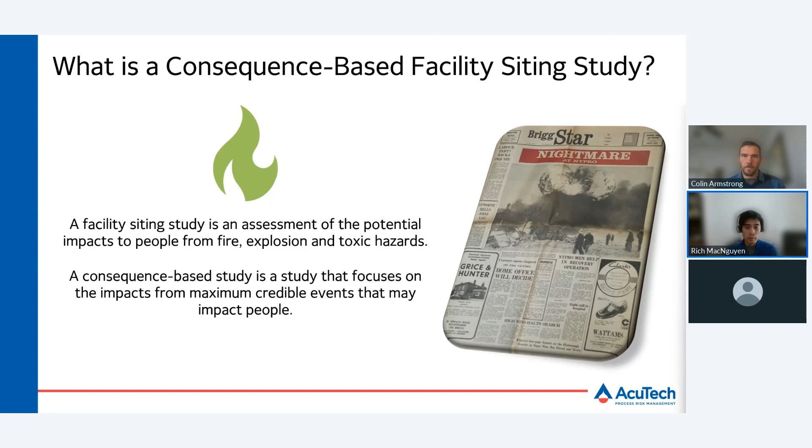So why perform a facility siting study? While the main objective is to understand the risk to occupied buildings, it answers the question, are people at my site safe? Reasons that may drive the need to perform a facility siting study typically include processes or operations known to be hazardous with potential to impact occupied buildings, buildings too close to the hazardous areas, buildings known or suspected to be under-designed to withstand potential impact from the hazardous process, siting new buildings, portable buildings, and tents to make sure they're optimally placed and meet design criteria for hazardous impacts, and determining optimal placement for new hazardous processes.

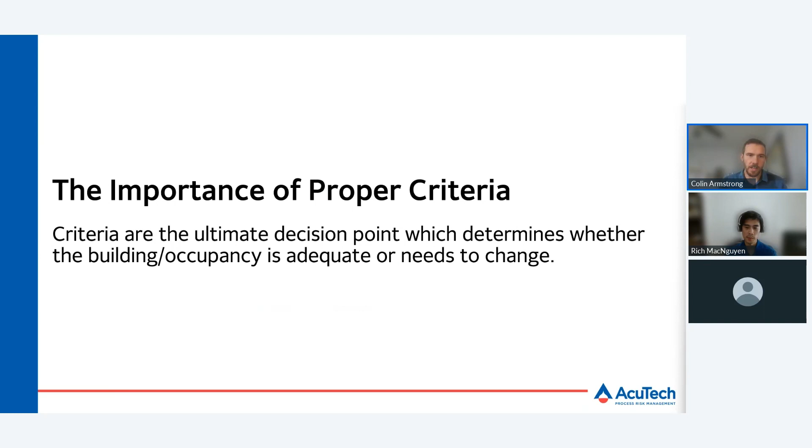Criteria used in siting studies are the ultimate decision point, which determines whether siting is adequate or needs to change. The impact criteria determines if building designs are acceptable relative to on-site hazards or new siting locations are safe. Proper criteria ensures that people at my site are safe, but the question becomes, when is the criteria proper? That's when it ensures safety without being overly burdensome. Criteria must consider the hazard type, the emergency response plan, and the building construction.

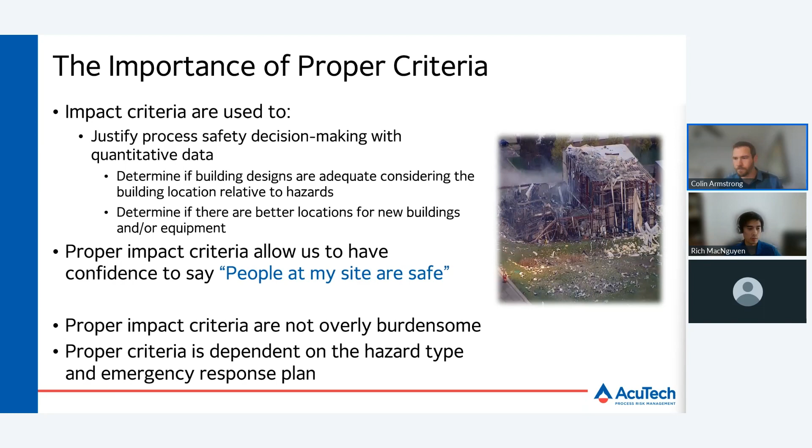For fire hazards, we can divide these into two general categories: short duration and long duration fire hazards. Long duration fire hazards are pool fires and jet fires, and these present for an extended period. For buildings and building occupants, the primary hazard is impingement or very high thermal radiation levels. These can result in structure fire, temperature rise, or impairment of egress routes.

A response concept must be chosen for long duration fire hazards if they can impact a building, and that response concept impacts the criteria that must be considered. The response concepts are generally to shelter in place or egress, and the response plan affects the hazards to people, and therefore the criteria that should be selected to determine if people at the site are safe.

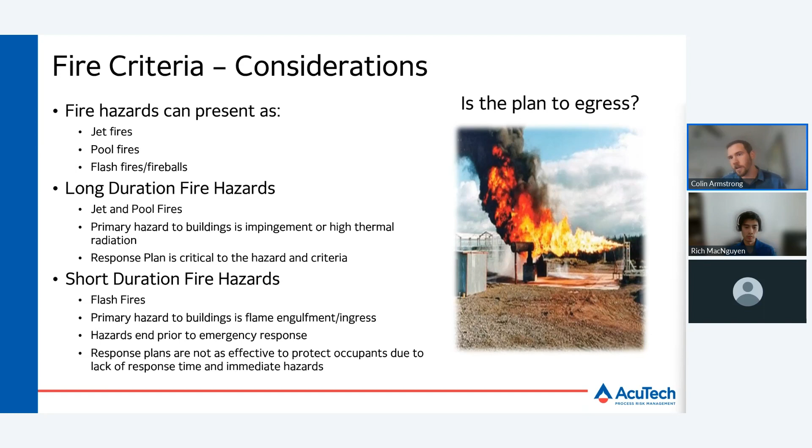Short duration fire hazards like flash fires or fireballs occur rapidly. There is no time for response, and they either result in immediate impacts or occur without impact. There's no time for response to mitigate the potential hazard. So the driver of the impact and the criteria becomes the personnel's location and the building construction if the personnel are located indoors, or we're talking about an indoor offsite population.

For long duration fire hazards, sheltering in place or egressing affects the hazard exposure to building occupants. Sheltering personnel are affected for the duration of a fire. They may be exposed to hazards from the building structure being ignited, if constructed of combustible material, internal temperature rise due to the fire outside, and potentially smoke ingress as well. Defined shelters must consider how long personnel need to remain in the building to operate the process, and how long it may be until the event is controlled.

Shelters often require emergency response functions to be conducted after an event, so we need to consider the duration of the event and the duration that we need to remain and operate the process for emergency control. Once the event is controlled, people can safely egress from the building, but they need to be able to shelter to withstand the duration of that design fire hazard.

Where the response concept is to egress, we must consider that personnel may be exposed directly to thermal radiation as they attempt to reach a safe distance or a muster point. We may consider whether people will be shielded from thermal radiation during egress and how far people must travel. Are the exit routes located away from hazards? Does the building provide shielding from jet fires or pool fires? These all would affect the way that people are exposed as they egress from the building and can be considered in the criteria.

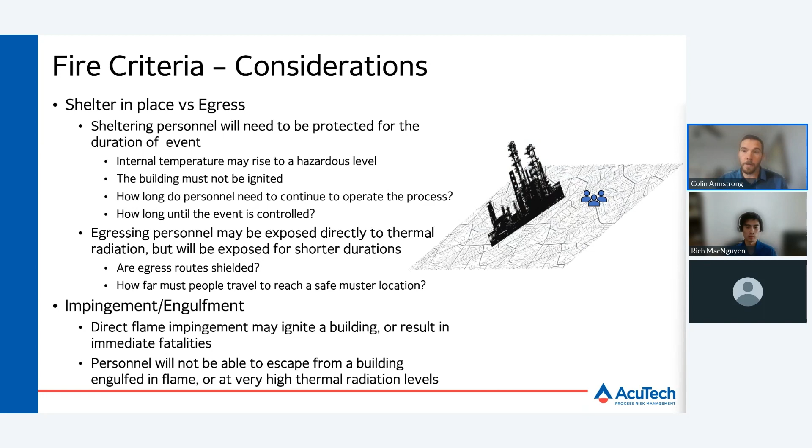Shelter-in-place locations must be designed to withstand engulfment, impingement, or high thermal radiation levels based on the maximum credible fire hazards identified in the siting study.

Egressing personnel will be exposed to thermal radiation levels upon ignition of a flame, but may seek refuge. Probit analysis can consider the impacts to personnel by evaluating not only thermal radiation levels, but also the duration of exposure. In the simplest form, these methods assume a person is standing still, exposed at the initial thermal radiation level for the duration of the fire hazard, or an assumed duration to reach a safe location.

of a lethal exposure from fire hazards to personnel outdoors in a refinery. A defined egress plan was considered, and a Probit equation was used to integrate the thermal dose over the egress route, considering the egress speed, the thermal radiation profile of the flame from pool fires and jet fires, as well as the distance to reach safety.

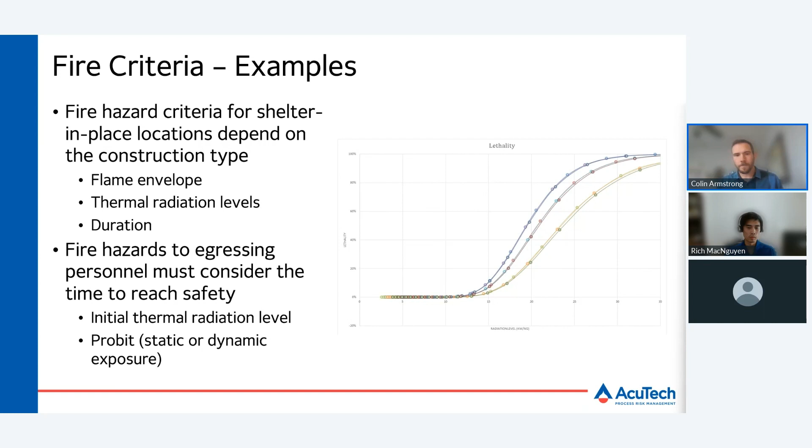For asset damage, we must consider a number of factors when evaluating criteria for fire hazards. The materials of construction, safeguards, and escalation potential affect the acceptable fire impingement criteria for assets. Generally, assets are damaged by direct fire impingement, although high thermal radiation levels may damage some equipment like cable trays and instrumentation and electrical at lower levels.

Criteria for asset damage can be found in the IOGP Risk Assessment Data Directory and other data resources. A detailed fire hazard analysis can be completed to assess potential asset damage that could result from a loss of containment scenario resulting in a fire hazard.

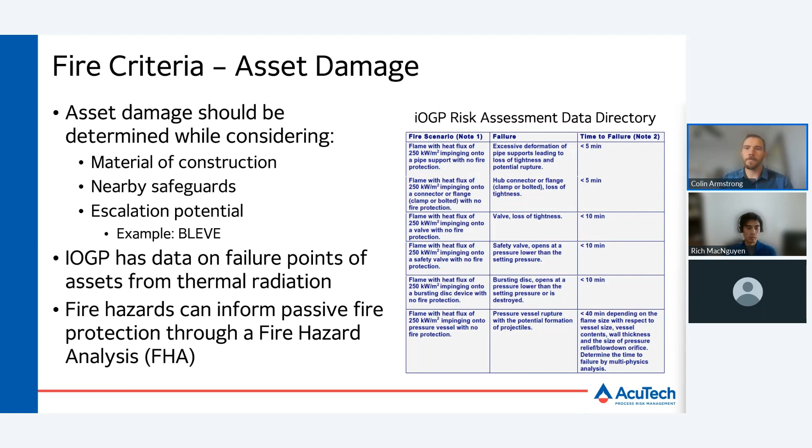Safeguards designed to mitigate fire hazards may be considered when criteria are set as well, although evaluation to ensure that the safeguard is effective to mitigate the hazard should be considered. For example, firewalls may not be rated for hydrocarbon fire protection, but rather structure fire, which presents lower thermal radiation and temperature profiles. A 60-minute A-rated firewall will not withstand a 60-minute jet fire.

But for long-duration fire events, safeguards may include firewalls, fire rating, deluge, or other extinguishing measures, as well as effective detection and isolation measures that stop the flow of fuel to the flame and mitigate the duration of the fire event. For short-duration fires, such as flash fires, building occupants may be protected by buildings that are tightly sealed with

positive pressure, interlocks to gas detection, and other measures. But if buildings have operable windows or doors that would allow for vapor ingress, or large bay doors that are maintained open, these factors should be considered in the siting criteria as well.

Many times we see workshops and other buildings where work is done that have large bay doors. Always, when on site evaluating occupied buildings, I make sure to ask: are these bay doors maintained open? Maybe we're there in the winter, they keep them closed to keep the building warm, but in the summer they keep them open at all times to allow for fresh air into the building and cooling. And in that case, we have a hazard of potential for flammable vapor ingress. Those people would not be protected in a flash fire event, where others may be.

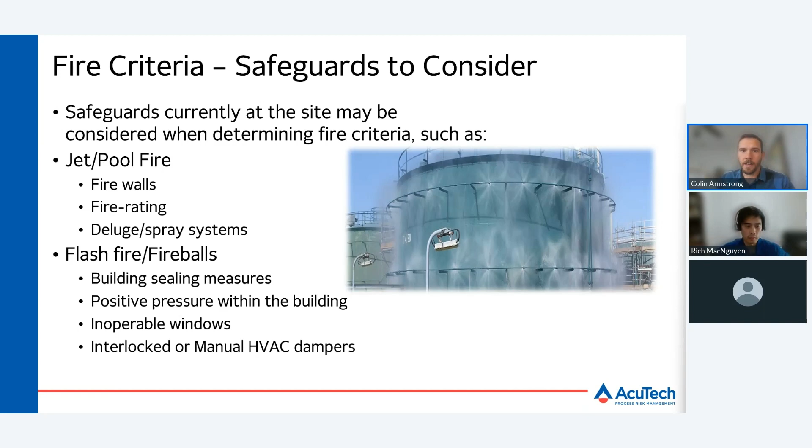Thanks, Colin. So now we will provide an overview of blast hazards. Blast refers to an event that can generate overpressure, which can be generated from a variety of sources. The blast events typically assessed in facility siting studies include vapor cloud explosion. These occur when flammable vapor accumulates in an obstructed region, which has a certain level of congestion and confinement, and then encounters an ignition source. Upon ignition, the vapor undergoes rapid combustion, resulting in an explosion that can generate overpressure.

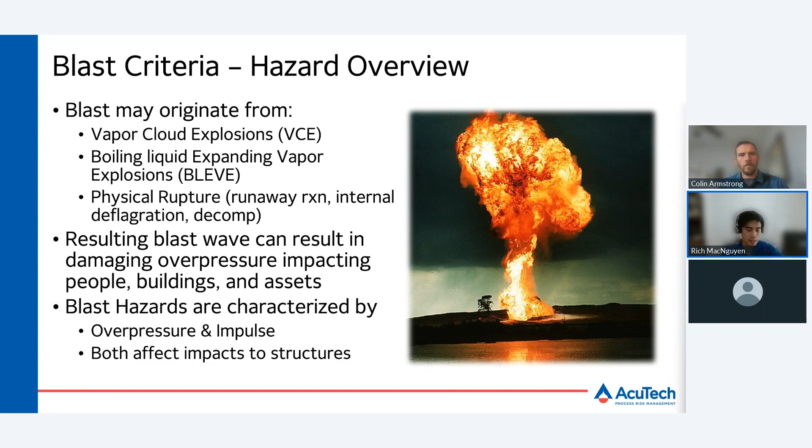Finally, physical rupture of a vessel or pressure vessel burst can also generate overpressure. These can occur from runaway reaction, internal deflagration of flammable vapor or combustible dust, or decomposition. The blast wave, whatever the source may be, may result in damaging overpressure that can impact people, building, and assets. The blast hazards are characterized by overpressure and impulse, and both are important factors in determining the magnitude of impacts to vulnerable targets, such as structures. The resulting impact depends on the type of target assessed, whether it be people, buildings, or assets, and the severity of the blast.

To develop blast criteria, the characteristics of the target and their vulnerability to blast overpressure and impulse must be understood. For buildings, the blast impact is dependent on building construction.

The literature provides building damage level curves for generic building categories that correlate damage with overpressure and impulse generated by the blast. The first approach is to use generic building categories, which is effective for assessing a large number of buildings. When many buildings are within a study, generic criteria can be used for screening analysis to categorize buildings into low and high impact categories.

Criteria may be based on overpressure only or a combination of overpressure and impulse. Criteria based on overpressure only simplifies the analysis and is suitable for screening purposes, as the criteria will assume a conservative impulse. For a more refined analysis, criteria can also consider impulse in addition to overpressure.

Building-specific analysis can be undertaken when refinements are required regarding the building impacts. This is typically done to account for building-specific features such as blast resistance. With a detailed analysis, the blast impact can be refined to account for blast angle, and impacts can be determined more specifically to each side of the building and specific building components, such as windows and doors.

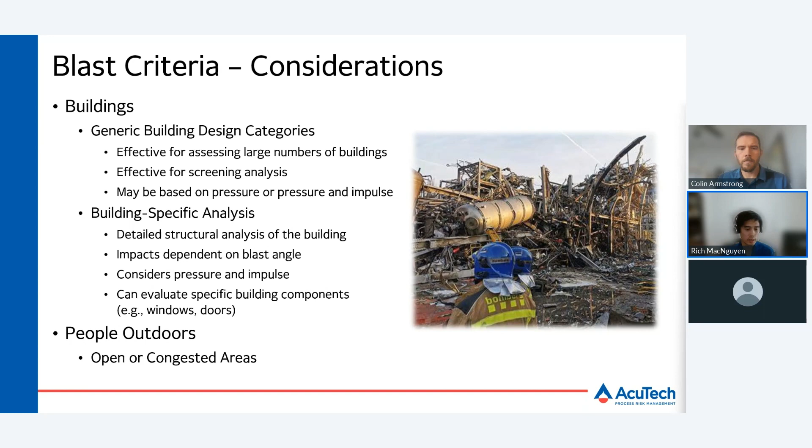Once building impact criteria are defined, it could then be associated with vulnerability for building occupants. For people outdoors, the criteria should consider where personnel could be located. Criteria are different for personnel located in relatively open areas compared to personnel within or near congested process areas, or large obstacles.

As mentioned previously, blast criteria can be defined using only overpressure. When the criteria are defined by overpressure, the impulse is assumed to be of sufficient duration to cause damage and result in a particular occupant vulnerability value. This is a conservative assumption and may be overly conservative for short duration blasts involving small cloud volumes.

So, next slide, please, Colin.

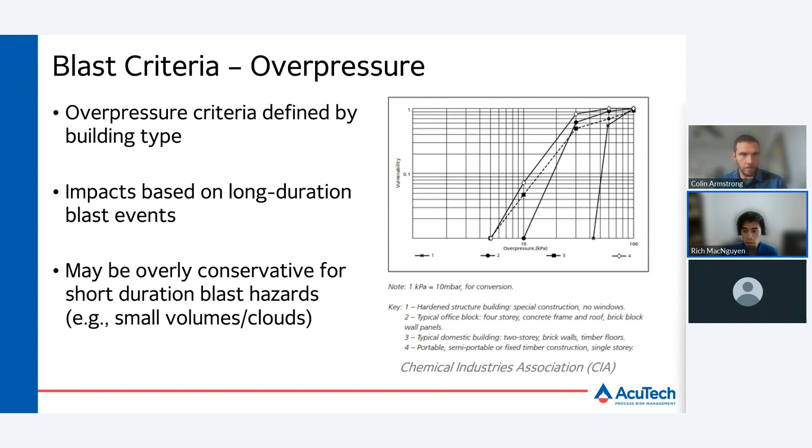Building damage levels are separated by curves on the plot, with building damage levels increasing as overpressure and impulse increase. To determine the building damage level, the overpressure and impulse from the blast scenario are plotted, and the region in which the overpressure impulse falls is the estimated building damage level.

Once the building damage level is determined, the vulnerability of building occupants can be estimated, which is also dependent on the building type.

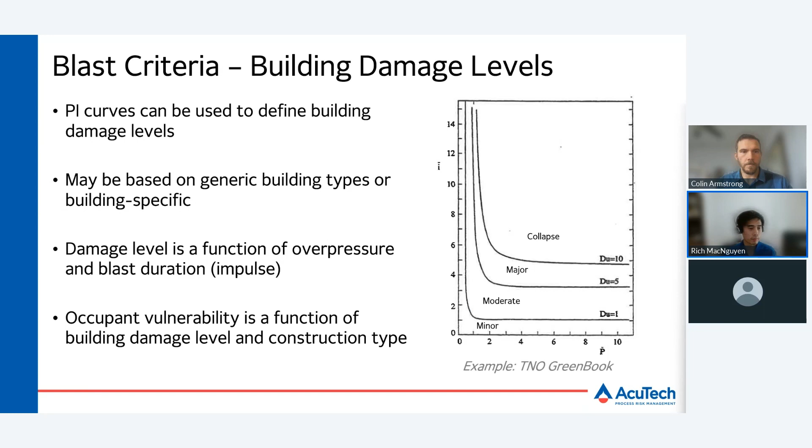Blast criteria can also be defined for asset damage. For asset damage, criteria are defined by overpressure, material of construction, and equipment type. The equipment type is important since the shape of the equipment dictates the magnitude of drag forces experienced by the equipment as the overpressure propagates.

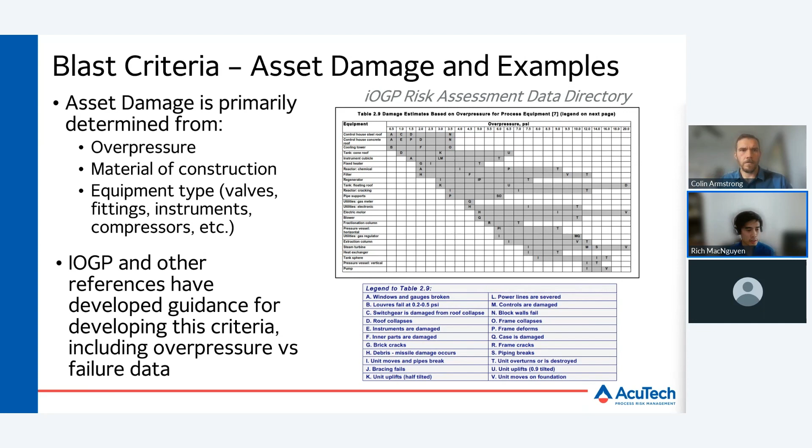Now I'll turn it back over to Colin to discuss the toxic criteria. All right, thanks, Rich.

So, toxics is the final hazard criteria we're going to cover here. Some of the most catastrophic incidents in the process industries have resulted from toxic releases. Toxic impacts can have a very large footprint depending on the quantity being handled, the conditions of the process, and the material toxicity. Toxic impacts are material specific, and the impact criteria and evaluation criteria needs to be specific to the material being handled.

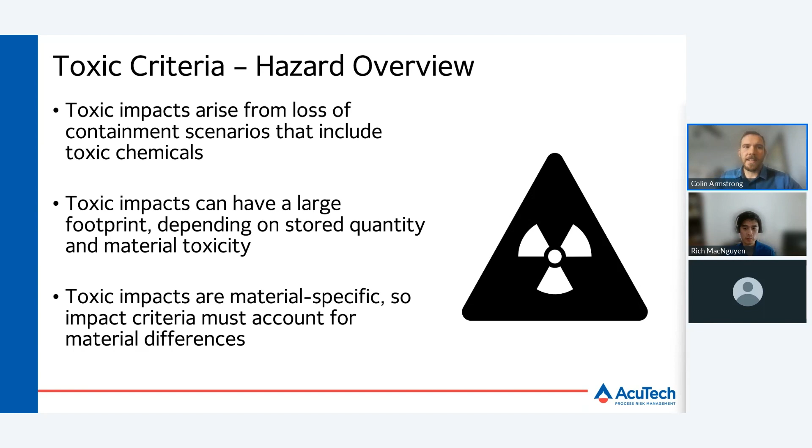Assessing the impacts of toxic releases may be done by considering the concentration of exposure. Published values such as the AEGL, IDLH, or LC50 values can be used to quantify the hazards to personnel. Outdoor concentrations are predicted by dispersion models, and indoor concentrations can be calculated based on a building's air change rate to understand the potential exposure concentrations indoors.

However, impacts based on concentration alone are generally very conservative. Published values and their effects are normally based on the onset of impacts to the most vulnerable population.

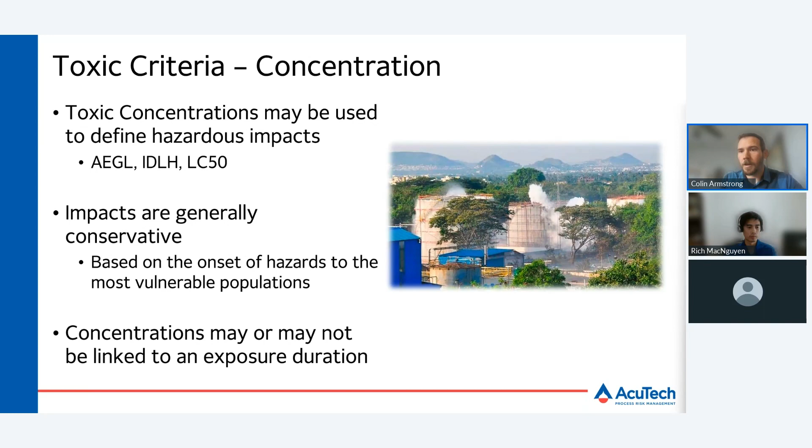Toxic dose and toxic probit calculations can be used to evaluate not only the concentration of exposure, but also the duration of an exposure. The impact of exposure duration varies by material. For some materials, a short exposure duration is hazardous, while other materials require a longer exposure duration. A probit function accounts for this in the probit constants, which are material specific.

As a comparison, ammonia has an IDLH value of 300 ppm and a 10-minute AEGL3 value of 2,700 ppm. So we can see how probit equations and the concentration values vary significantly. But again, those concentrations are defined to represent the onset of hazards and generally are defined for emergency response planning.

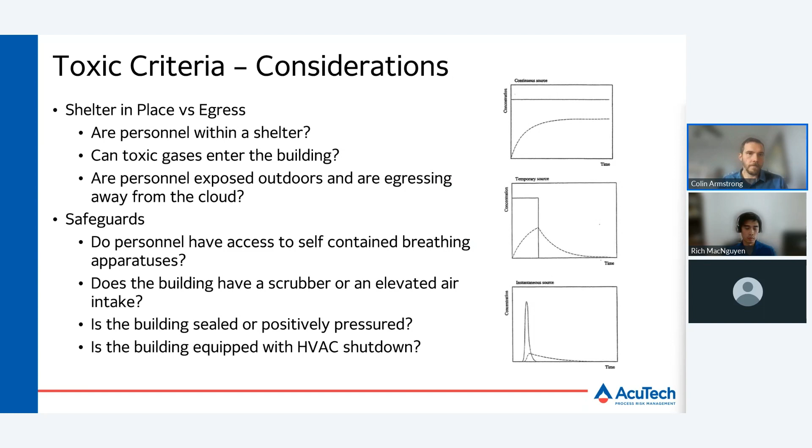All right, so we're going to go through another poll here. The question is, how have you used facility siting to inform your site emergency response plans and risk reduction? We know that generally siting is done to evaluate occupied buildings.

We may evaluate off-site populations and on-site populations as well, but it has many uses to inform emergency response plans and other risk reduction measures. So the question is, how have those of you here used it to do things other than just designing and retrofitting occupied buildings or locating occupied buildings?

We're seeing some results coming in here, but it's a multiple selection option, so I'm sure it takes a moment to go through the list.

Appreciate the poll responses here. I'll publish it, even though there's still some results flowing in, but obviously we see the most voted answer here is to locate the occupied buildings. That is the classic reason facility siting is done.

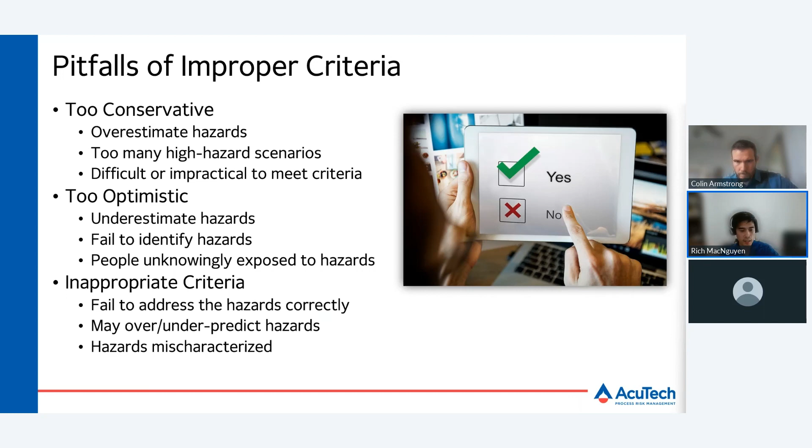Overall, the level of analysis can be grouped into three overarching categories: simple/screening, advanced, or detailed analysis. The siting study should define criteria at a level appropriate to the detail required to properly manage the hazard. For screening purposes, simpler but more conservative criteria can be used, such as thermal radiation for fires, concentration endpoints for flammable and toxic gas dispersion, and overpressure for blast.

As a subsequent refinement step, the study can focus on vulnerable buildings where impact results in increased risk to personnel. At this point, more advanced criteria can be used that factor in the time element, such as thermal dose, toxic probits, and PI curves.

If further analysis is required to support safe building design and proper risk management, a detailed approach can be pursued, which involves specific analysis of high-risk hazards. For example, if a building is particularly vulnerable to blast overpressure, a detailed structural analysis can help identify weak points to reinforce, which would then increase the building's blast resistance.

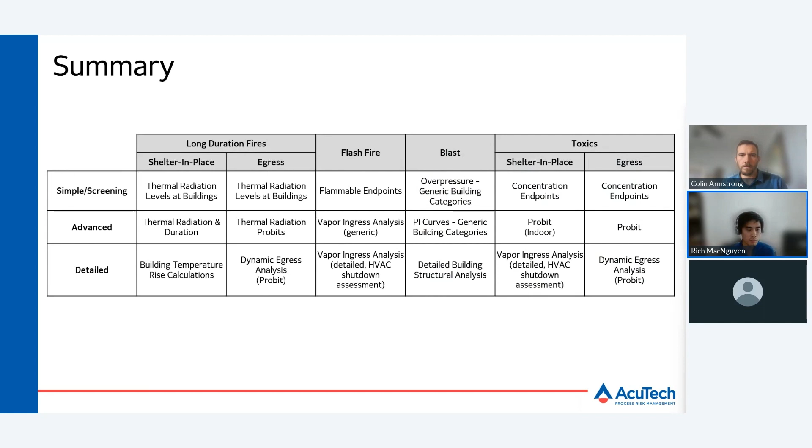Sorry, Colin, you're on mute.

Overall, proper criteria needs to consider a number of factors. For fire, we need to consider the difference in fire type, whether they be long or short duration fire events. We need to consider the building construction, the duration of the fire event, and whether people will be outdoors egressing from the flame or indoors sheltering in place.

For blast, we need to consider the building design, the pressure and impulse, the existing mitigation measures, and impacts to both personnel indoors and outdoors. Again, there are different levels of detail we can get to in that blast analysis.

For toxics, we need to consider the unique toxic chemical properties, indoor and outdoor concentrations based on the air change rate of the building. We may need to consider the HVAC system design and how that affects the ingress of air into the building, as well as other existing safeguards that might be present, things like PPE, respirators, SCBAs, breathing air supplies.

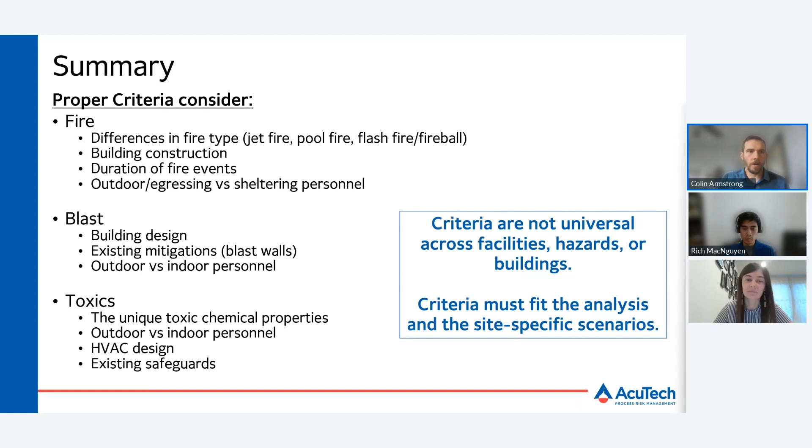Can you explain further why positive pressure within the building should be considered for flash fire? Yeah, so positive pressure is really an indication that a building is tightly sealed against air ingress. It means that the fresh air intake to the building is sufficient to ensure that we don't have air ingressing into the building through leak points. At the time an HVAC system would be shut down, that positive pressure would start to decay, but it limits, once that HVAC system is shut down, the ability of air to ingress into the building.

If that positive pressure is integrated with an elevated air intake or some other fresh air supply, depending on the hazard that's been identified, it may be able to entirely prevent, say, a low-lying gas cloud from ingressing into the building.

Right, let's see here. We've got, are you modeling dust explosions? If so, how?

Yeah, so dust explosions are something we run into often. We do have a group that specializes here in dust hazards and does dust hazard analyses. We often support them in that analysis. Generally with dust explosions, we're evaluating the potential pressure rise in confined dust environments using applicable fire codes to